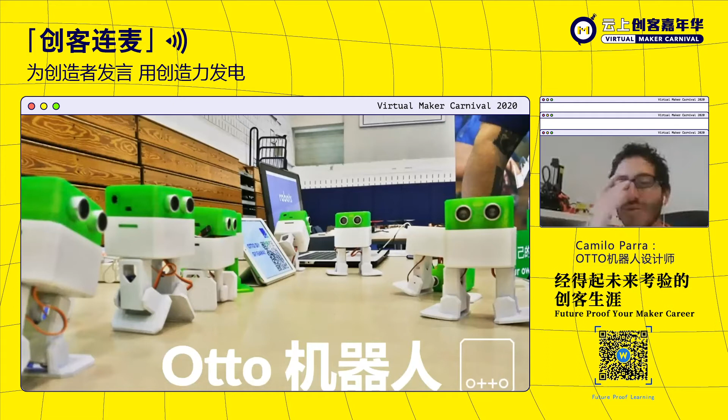I'm going to share my screen so we have more visual support here. This is Otto Robot. Many know me just for Otto Robot, but before getting there, like many makers, you get to make a lot of projects first. I actually started Otto in 2016, but back in 2014 when I moved to Shanghai, I was working full-time as an industrial designer for a company doing inflatable products. But they didn't have 3D printers—it was not such a fun thing. They always outsourced the fabrication of the prototypes, and I really didn't like that.

So in my spare time, I was spending time in the hackerspace XinCheJian, or the Mushroom Cloud in DFRobot, even in the Fablab of Tongji Daxue. I met great people, and that's where I started to learn robotics, because I'm not a roboticist myself. I learned Arduino, I learned 3D printing, and you get involved in that world—you start to buy a machine, buy parts on Taobao for your prototypes. Sooner or later, about two years after, I finally launched my own thing.

But before that, I did a lot of designs. One thing I want to show here is that the robots on top were designs I thought, as an industrial designer, I could make. They look nice, but in the real world they didn't work, because once I started to make them, I started to learn a lot of things by making.

Only until the latest one did I really start to make sense of the logic of building a robot, the mechanics involved, and the process to make prototypes work—the coding, the mechanics, the electronics. Only when you combine all these skills can you really start to make things reality.

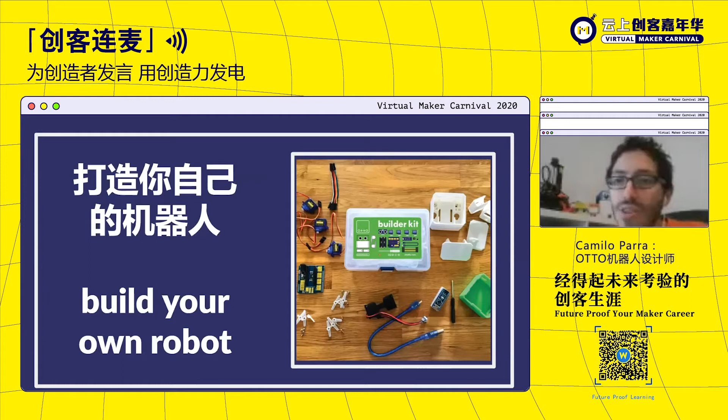The idea is that anybody can make their own robot and learn about technology in a fun way. It doesn't have to be boring theory like you learn even in university—building a robot teaches you a lot, not only robotics, but also technology, design, coding, and more.

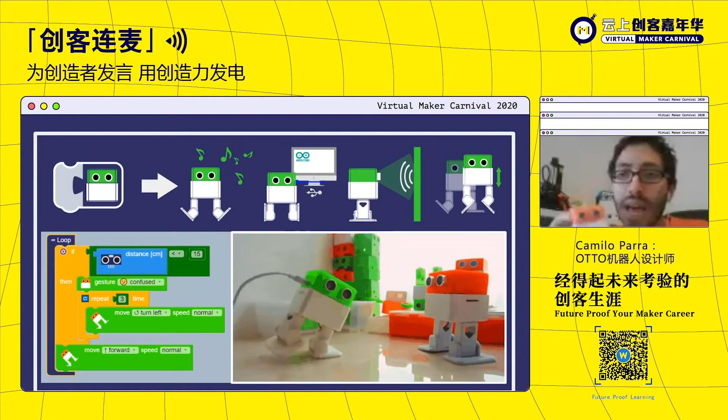Many people who don't know Otto maybe don't know what it does. In its basic form, it's this robot I have here, and it can walk and dance. You can program it, and it can avoid obstacles using ultrasound. It's 3D printable, open source in both software and hardware, and now we have block graphical programming, so even the programming is very easy for beginners.

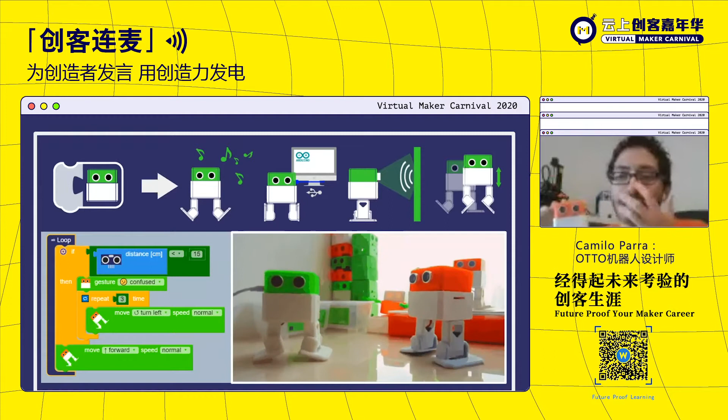But of course we didn't stop there. One thing we saw once we launched it is that many people started creating their own variations, myself included. We started from the bottom, but now the one I have in my hands has Bluetooth and you can control it with an app. We have others with LED eyes made with laser cutting—so we didn't limit ourselves to just 3D printing. Then we added arms, LED mouths, and other features.

We see it as a progression. Some people like to jump right into complicated humanoids, but we see it as a learning curve for people to progress into more advanced robotics. The starting point is still the small robot, Otto. Right now we have a community of more than 4,000 members across around 70 countries, thanks to the open source nature of the project.

One of the challenges we had was documentation. In Shanghai, I met the team of Wikifactory when we had all our documentation scattered across GitHub and Thingiverse—it was a mess. Then we really met the Wikifactory team, and since then we've been attached to them all the time for documentation and additional events and challenges, which I'll show you soon.

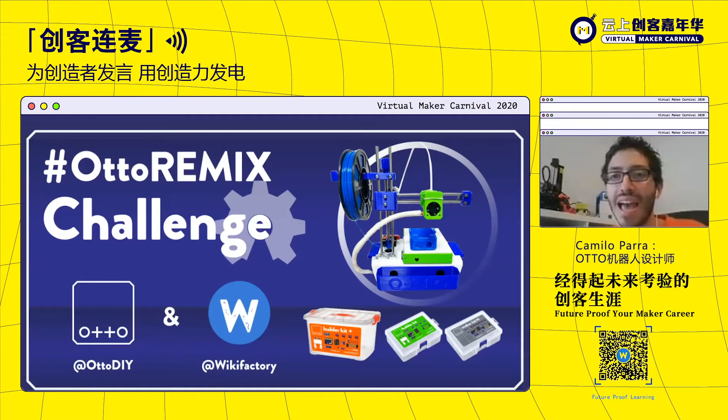With Wikifactory, we created a great challenge last year that inspired a lot of people to create their own remixes, as we call them. Right now there are more than 100 remixes, maybe 200, counting the ones connected on the platform through Thingiverse or elsewhere we still need to bring in, since people are always creating new stuff. More than 25,000 people have replicated the robot, based on download statistics and social media posts showing people who made the robot.

This is a short video that presents a little bit of the process of how the robot is made.

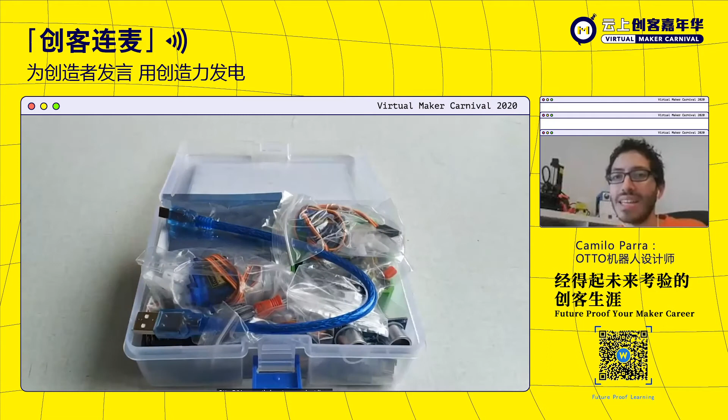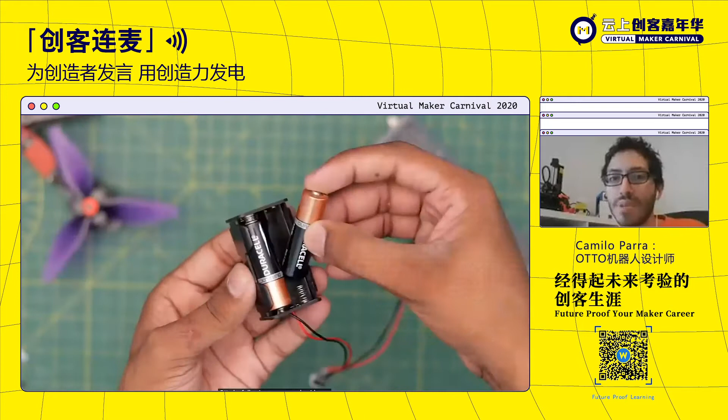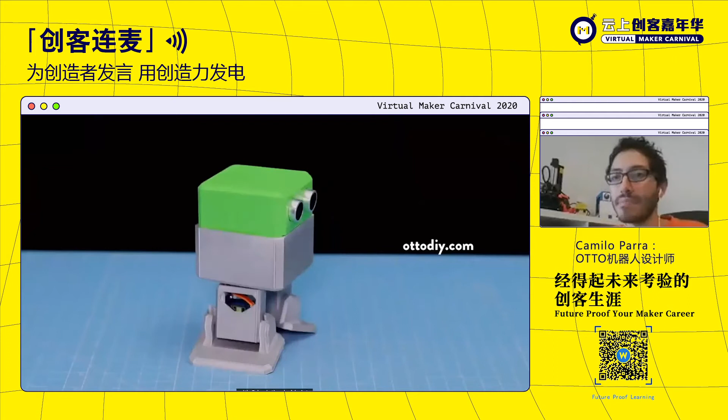It comes in a kit, and you build it from all the parts you have. You have everything, even the screwdriver you need to build it, all the plastic parts made on the 3D printer, and even the battery holder. It's an Arduino compatible kit, so it can be programmed with Arduino. The good thing is you can 3D print so you can decide what color you want.

The first kit we showed was a builder kit that already comes with the 3D print parts, but people can decide not to and just get the electronic parts.

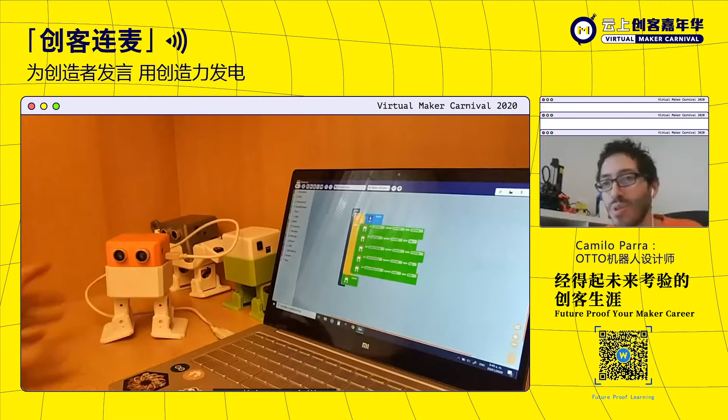Here is how you program it with the Blockly that we also created, and it's open source based on OttoBlockly, which is based on the Blockly graphical programming language of Google. We made a remix of the software so it can be dedicated to Otto.

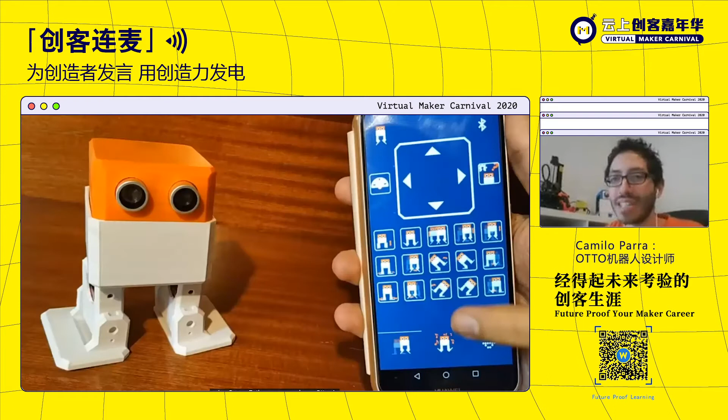Right now, here, this is the app. We also developed an app that is open source and allows you to make the basic movements of the robot, and you can even have some little sequences.

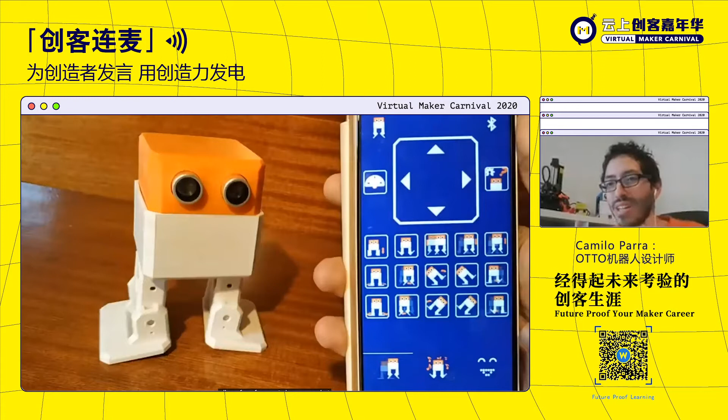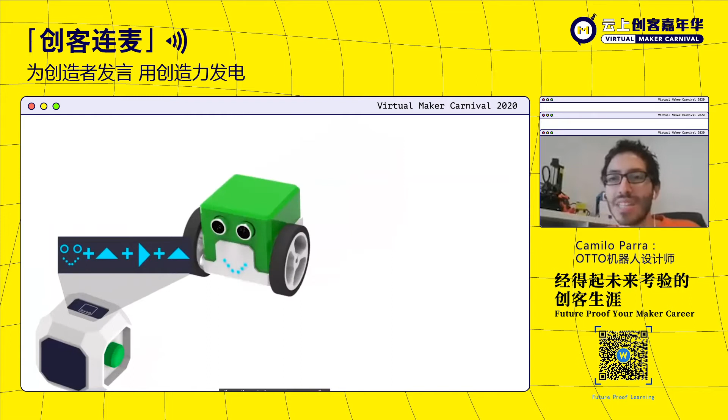This is something we are working on, so I'm revealing some hidden things, and it's more into tangible programming. We are moving towards a new era where even a 4-year-old kid can learn how to program.

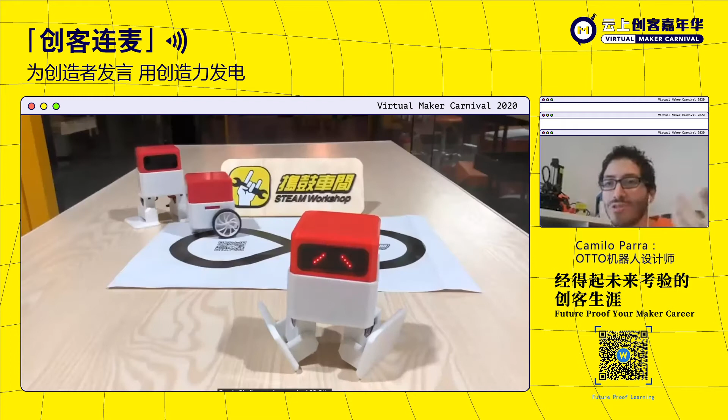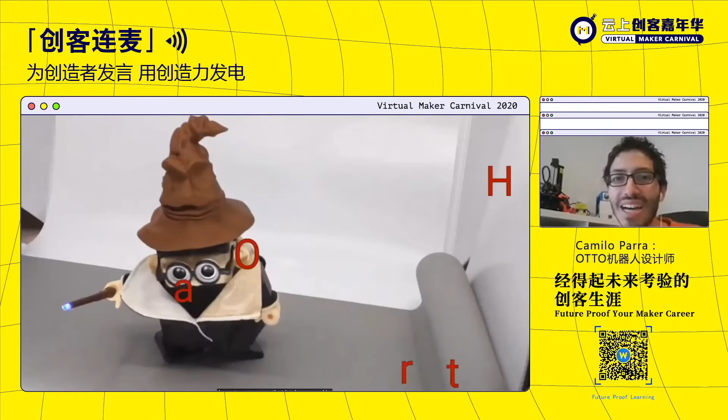Also in China, we saw many people creating remixes when I was living there. This was Pando by one of my friends in Hangzhou. You see all kinds of creations, here Harry Otto, the spider one. It really depends on what people want to do.

We are also working on a new version that we may want to mass produce.

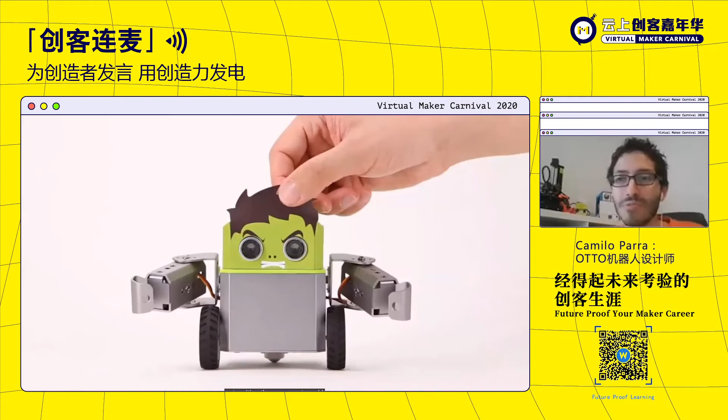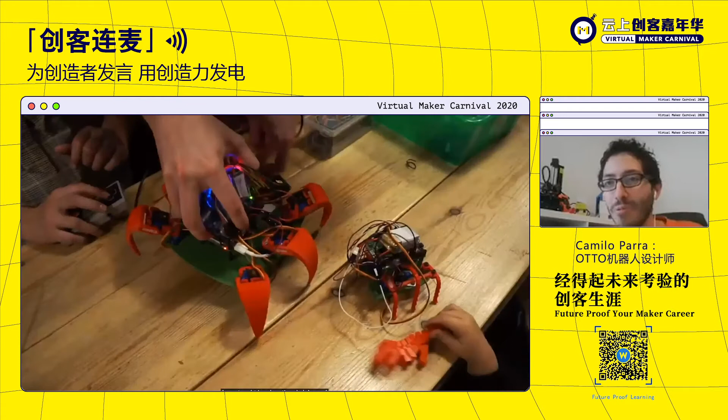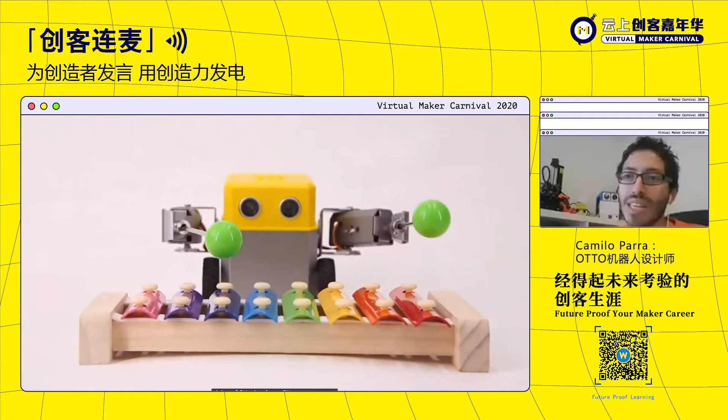Here you will see some pictures of the event we made with Wikifactory in Spain this year. We made a workshop. Unfortunately, now because of the situation, we don't do more workshops, but this is something we were also doing a lot in Shanghai. That's how I started doing workshops, to include people into the making.

Now we are even thinking about having a more modular robot that can be assembled in different ways with the same parts, and that's kind of the next step of the project.

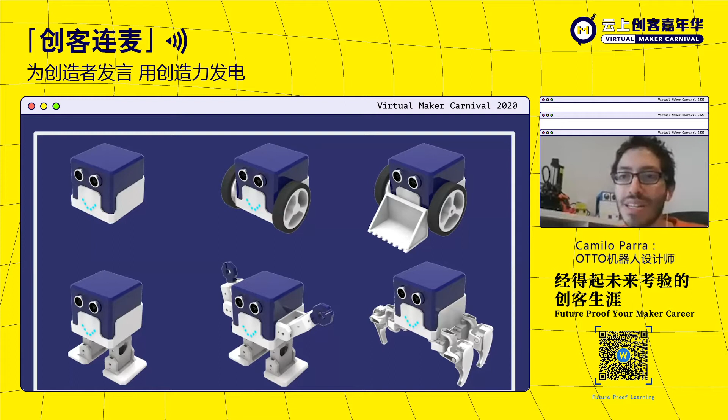Another new thing I wanted to share today is we are having our own educational platform that we call Otto Academy. Basically it's to gather all this knowledge we have been putting out there, but not really in a format for schools.

Now we are organizing it into courses and different learning experiences with our new Otto Scratch AI. You saw Blockly before - Blockly's interface is more like the old one, let's say, and Scratch is very popular in schools. So now we are working on the Scratch one, and we added AI into it.

The way we are adding AI into it is that you can have, for example, face recognition, voice recognition as well, and even pose detection with the robot. Somehow what we do is connect it to Watson.

Assistant that is by IBM. You interact with the cloud that has all the AI, and the AI sends the interactions to the robot. This is something very cool that we are already demoing in the last month.

We hope we can create a learning experience with this in our new platform to learn about artificial intelligence, design, and engineering coding. Those are the three areas we want to educate people with our kids, with the robot, so they can not just limit it to the building part, but also to all the learning behind that - which I somehow had to learn through the development of the robot, but now in a conscious learning system. Thanks for your time.

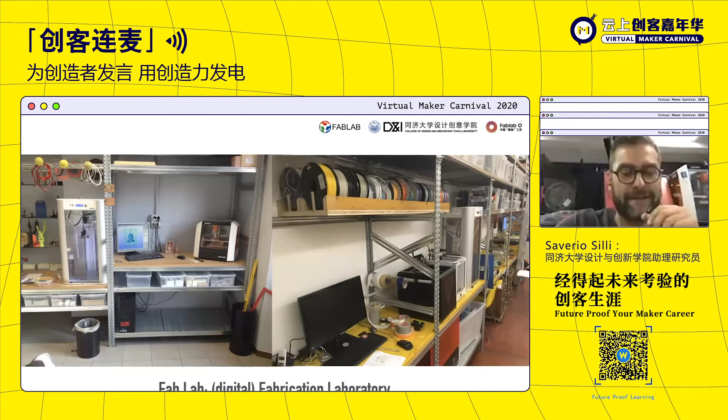So this story is a story about bits and atoms. You start from the computer world, the information world, and through digital fabrication, you can make real things in the real physical world. You do it in a Fab Lab, at least that's where I do it. Fab Lab means fabrication laboratory. It was started by Professor Gershenfeld at the Center for Bits and Atoms at MIT in Boston. So again, bits and atoms put together, digital fabrication.

These Fab Labs are a place where you can find all digital fabrication machines, and they are so successful that there are more than 2,000 Fab Labs all around the world now.

At MIT, Professor Gershenfeld teaches a class called How to Make Anything. This class is open every year to 15 students enrolled at MIT. But Professor Gershenfeld thought, what about opening this class to everyone who wants to join through online teaching and offline inside each Fab Lab around the world?

There are so many Fab Labs that are all connected in a network, and so the same class that Professor Gershenfeld teaches at MIT is also taught in Fab Labs, and it's called Fab Academy. This is the class that I took as a student, and that basically changed my career and changed my life.

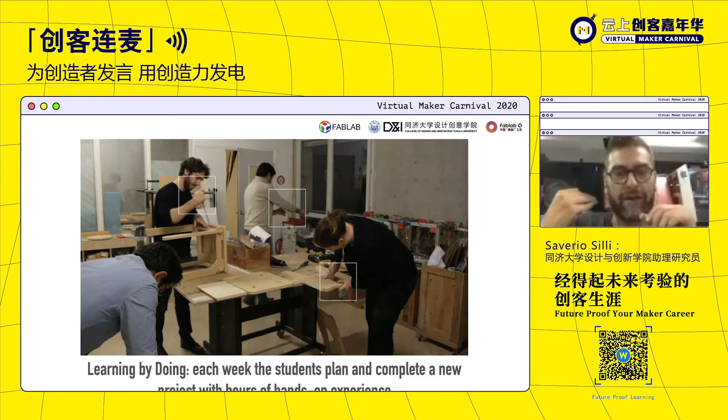This is the way it looks when we are all connected in this virtual classroom. Every Fab Lab is a local classroom of this network. Inside the Fab Lab, you learn by doing. This is really the basic of STEAM and STEM education and project-based learning that is now so popular. It's hands-on experience. You have all these tools and machines, and you have a project every week in which you have to make something.

So you learn how to use all the machines, the laser cutter, you learn techniques like molding and casting, you learn how to 3D scan and 3D print, you learn large format machines like a CNC router that you can use to make things - actually the table I am sitting at now is made with one of these machines.

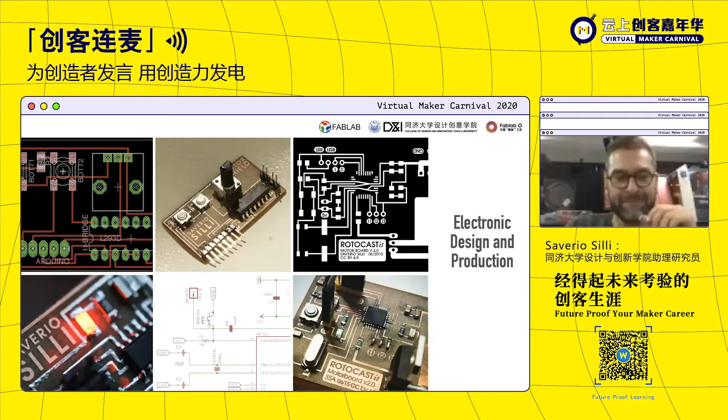You also learn, of course, that a digital fabrication machine is nothing without knowing how to design and make the file that you're going to send to the machine, and programming as well.

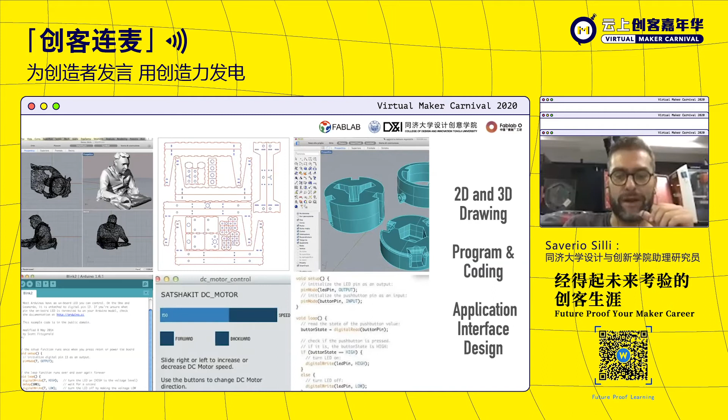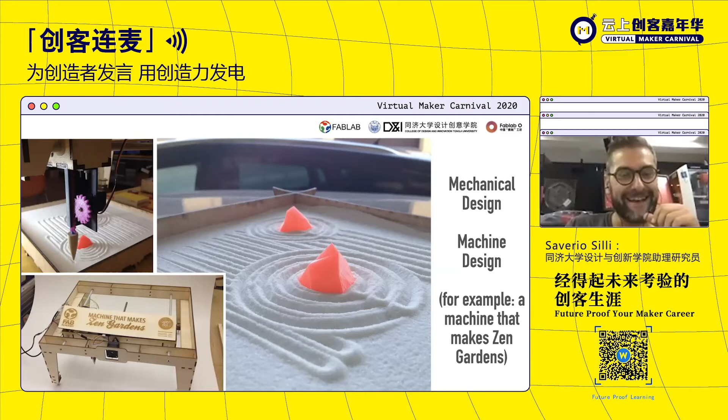Fab Academy is a class taught in Fab Labs around the world. I am the local instructor here in Shanghai. We've been doing it for almost 4 years now, and we're going to start a 5th year next semester. It's a digital fabrication course delivered through the global Fab Lab network, in which students make 18 weekly projects and one final personal project.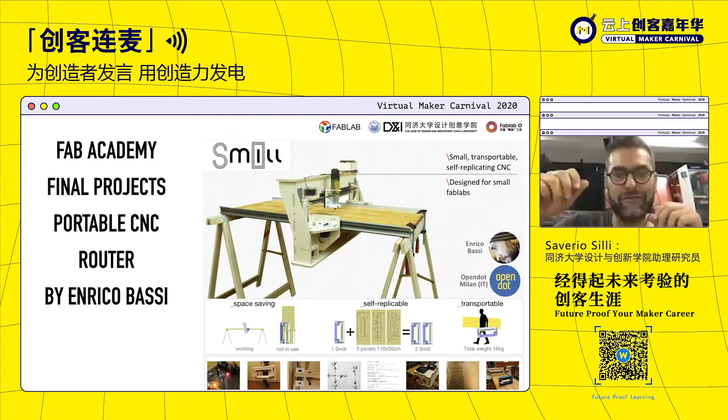You actually don't need a big machine that sits on the floor; instead you attach the machine to the wooden board you are going to cut. Another multi-tool machine by Gianluca Pugliese lets you change the actuator. It can be a pen, a marker, a little router, and you can put it anywhere you want, on the floor, on the wall, and so on.

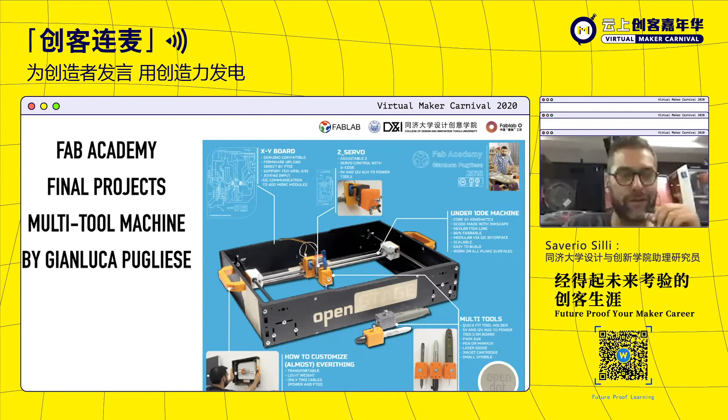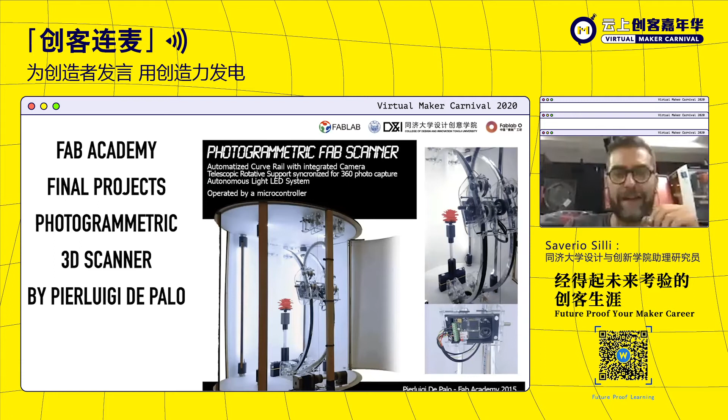A photogrammetric scanner is a machine used to take a precise 3D scan of an object while it rotates, by Pierluigi De Palo. And then finally, the machine that I made as a student in Fab Academy, a rotational casting machine.

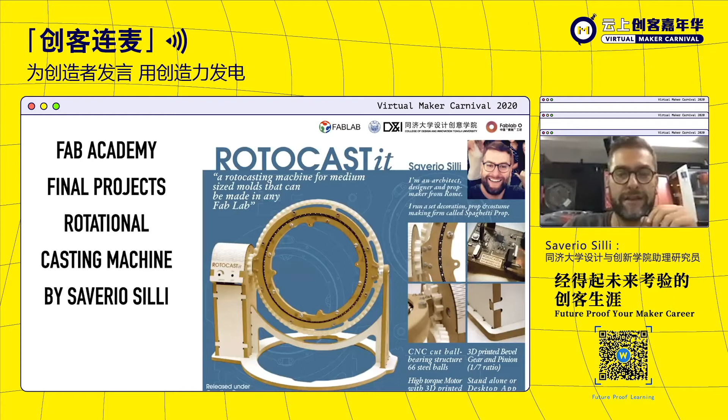I have always been in love with molding and casting, so I created a machine to help me make better castings. My aim in designing this machine was to make something that could be designed, created, and fabricated in a Fab Lab with the machines you have there. It's not a new invention, but it features a different way of working, like a very big ball bearing.

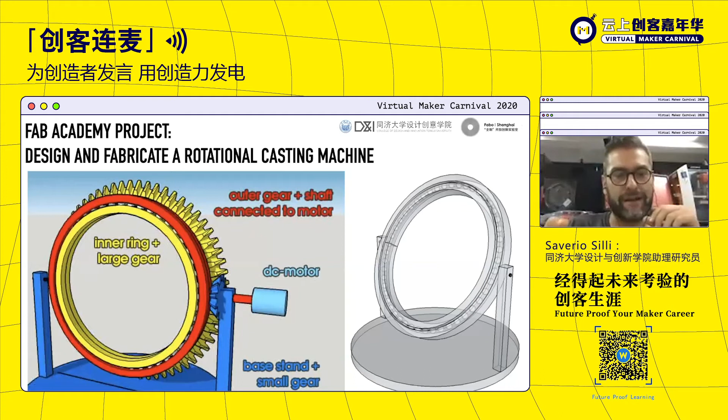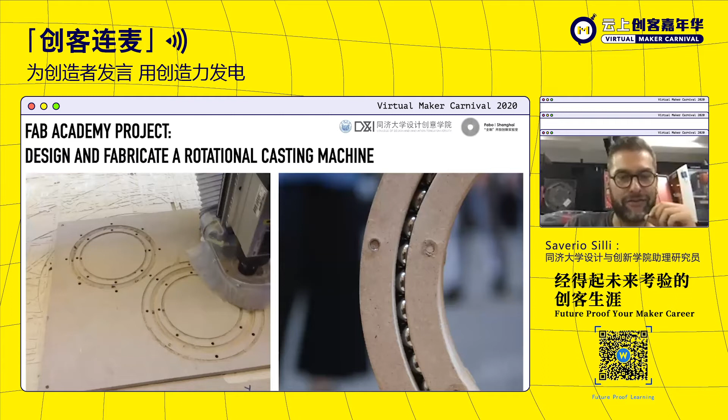I made all the design of this machine and found a way to fabricate it with the machines I had in the Fab Lab. This was the first attempt at cutting a piece of MDF. In this little video you can see there is a mix of techniques: 3D printed gears, CNC machined wood, and wood that I just cut with a handsaw.

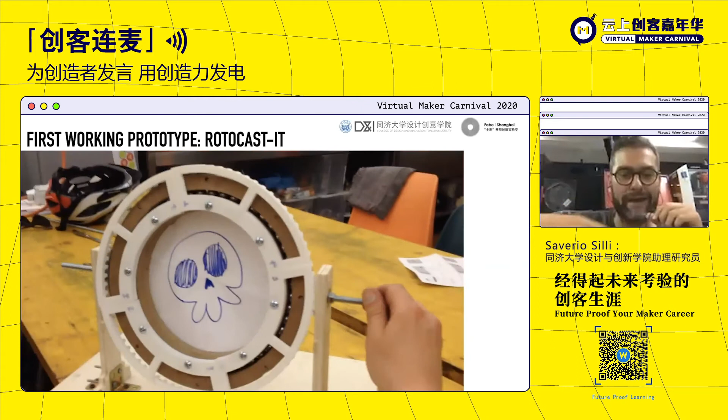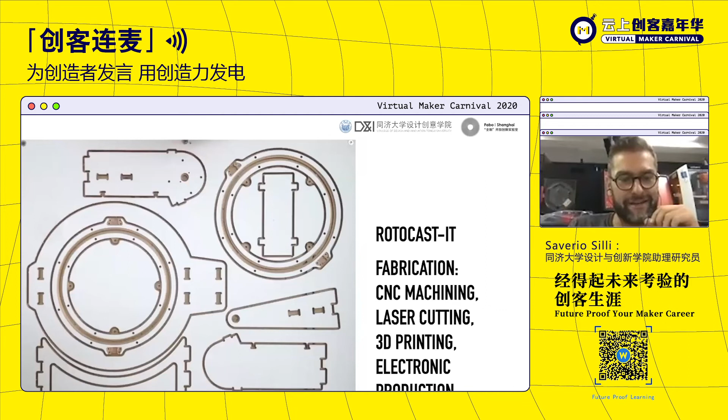The idea of this machine is that while it rotates on one axis, it also has an additional rotation inside. This is the design I made for cutting the machine parts on a CNC router - as you can see it gets a little more detailed here. And this is the image of the wooden panel after cutting.

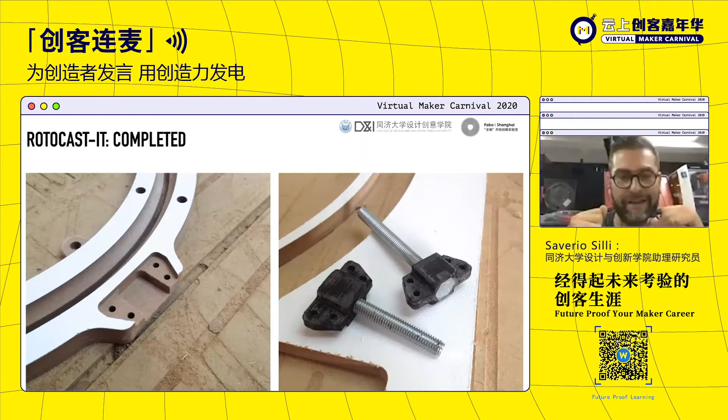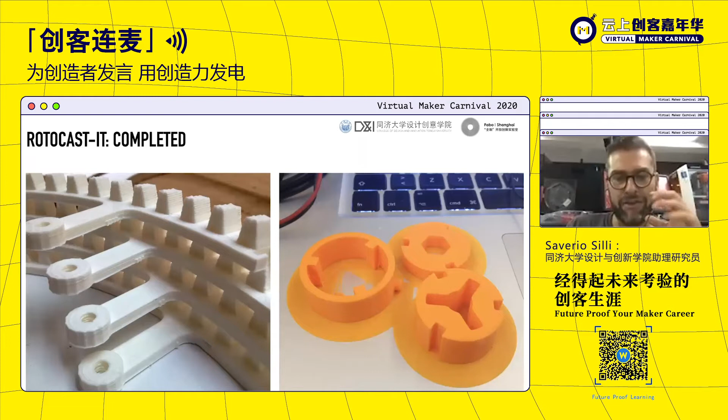I really limited, to the least possible, the things you have to buy - only bolts and a steel ball, and most of it is 3D printed. To make this machine I used the laser cutter, the CNC machine, and the 3D printer, and I also designed my own electronics. It's like an Arduino, but made by myself, with only the functions I need - not all the pins are available, only the ones I really need for this machine to work.

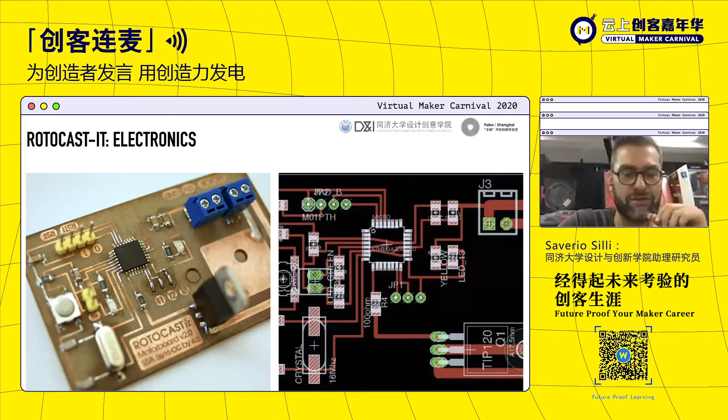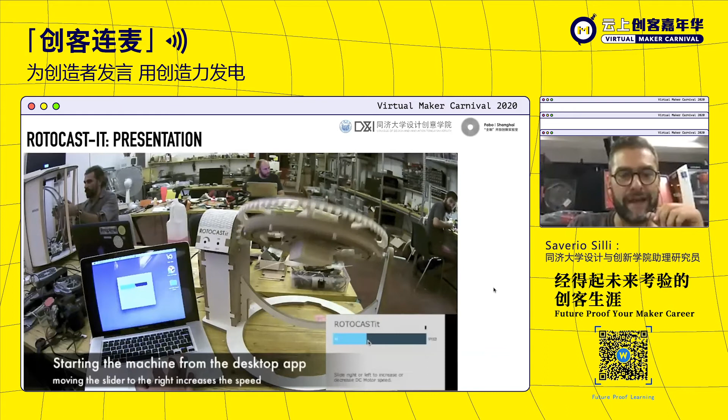This is a little video of the machine working. You insert a mold inside the machine, then there is an application you can use to control the movement, and the machine rotates. After a little while - like an hour or less depending on what material you're using to make the mold - you can stop the machine, open it, and remove the mold.

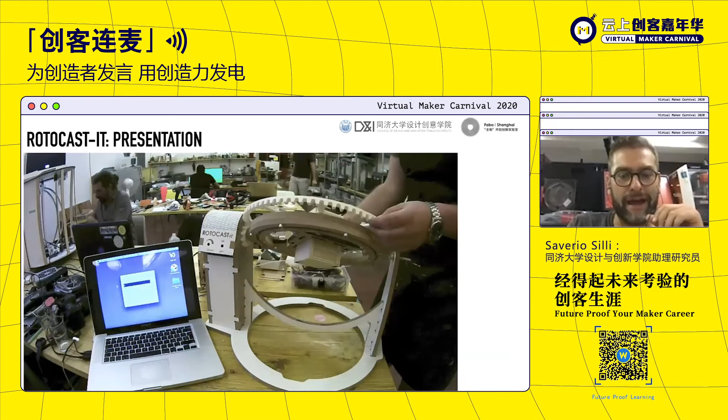Inside of this mold, here I am opening it, and this object that you see inside is hollow. So the idea of this machine is to make hollow objects.

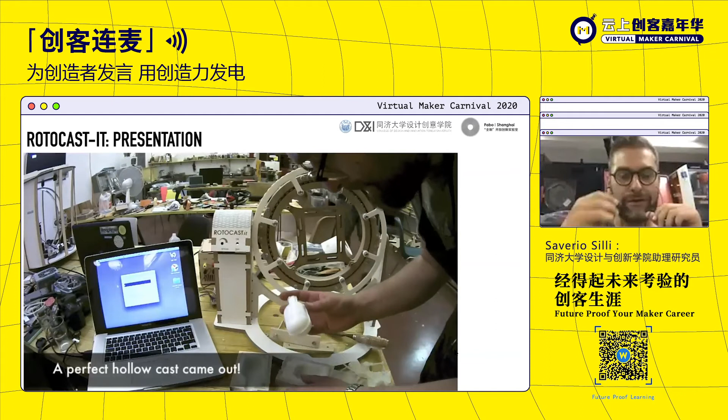So my story ends this way. In my opinion, documentation is the foundation of open source. I decided to release this project under an open source license. I wrote a long documentation on a website, took screenshots of all the settings of the machine I was using, what tool I was using, made a bill of materials and everything, and released this project as open source. I even uploaded it on Wikifactory.

And it is open source, ready for everyone to download and use.

And I also had some problems. This machine was just the first prototype, and it had a problem that the rotation was not so smooth. So I said, okay, I have this problem, I will come back and fix it. And then something happened and life goes on, and I moved to another project, and I never went back to fix that problem.

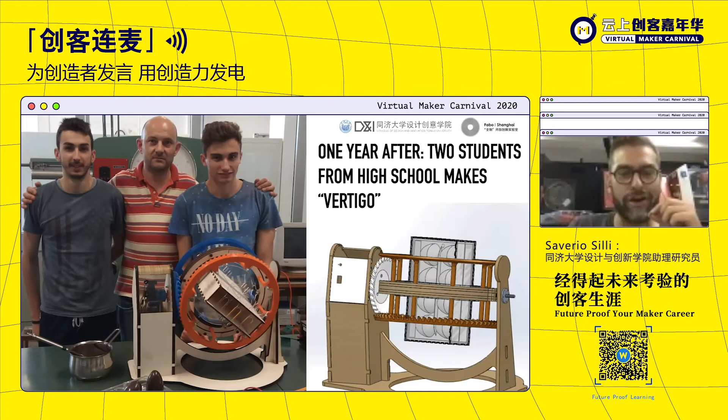Until I received an email and a picture from these three guys. This is one teacher in a high school and two high school students. They found my project online, they read my documentation, they liked my machine, they made their own version, and they even fixed the problem that I discovered, and they used their machine to make chocolate eggs. So chocolate eggs that are hollow inside. This is a very famous dessert-like thing in Italy for a holiday.

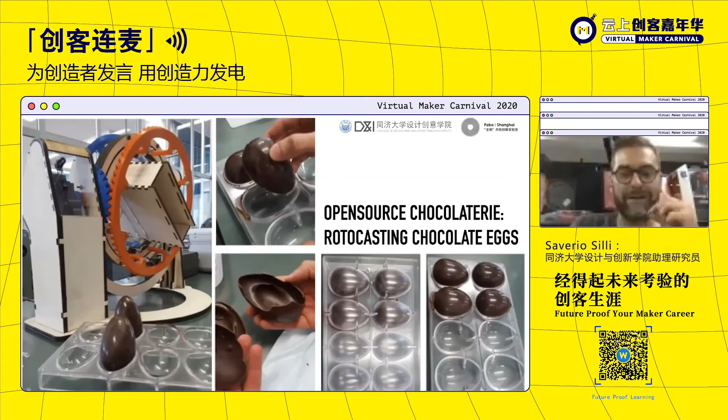And when I received this email from them, I was so happy. We even met at a Maker Faire in Rome, and we put these two machines together. And then I downloaded and printed the part that they fixed, and I updated my machine. So because of an open source license, I was able to have basically research and development and fixing problems, debugging made by someone else for free.

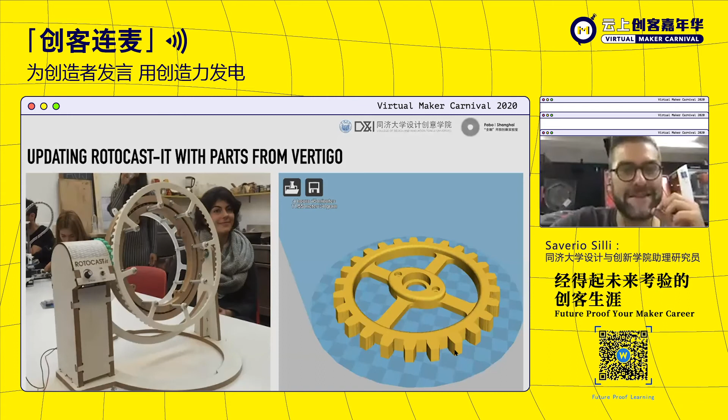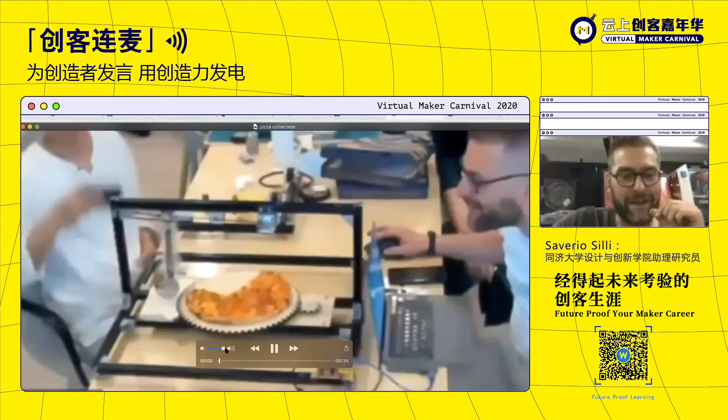My story ends here, but I want to show you my page on this project on Wikifactory. And one last thing, I don't know if the video maybe is not so detailed, but this is the last project that I've been working on with my students. It is a machine, but this is a pizza cutter. So you can make a machine that does not make much, does not change the world. This machine cuts pizza. It was maybe for fun, but this is the kind of project that we like to work on. So once you learn how to make a machine, you can learn many of them.

This was during the Fab Academy presentation in the last semester. This is it. I can stop sharing. I hope you enjoyed my little story. And if you happen to be in Shanghai and you want to come take a look at Fablab O, we are always open.

What a great story, Saverio. I loved it. So true. So clearly, thanks to good documentation, not only can others like yourself learn the projects, but you can also begin to contribute and remix on the projects, whether it's OttoDIY, whether it's on the Rotocast-it. This is what it's about. You can take reins of your learning and contribute to these incredible innovation areas. I'm going to take one quick moment because this is the cue.

You mentioned OpenStage, you mentioned the S-Mill. They're also part of this collection of future-proof learning projects that we'll be sharing through our QR code and through the link provided. And if you click through, it will take you to this great page that has all of these projects. It includes OttoDIY, of course, and the Rotocast-it. There's a whole ton of projects. They're all very well documented.

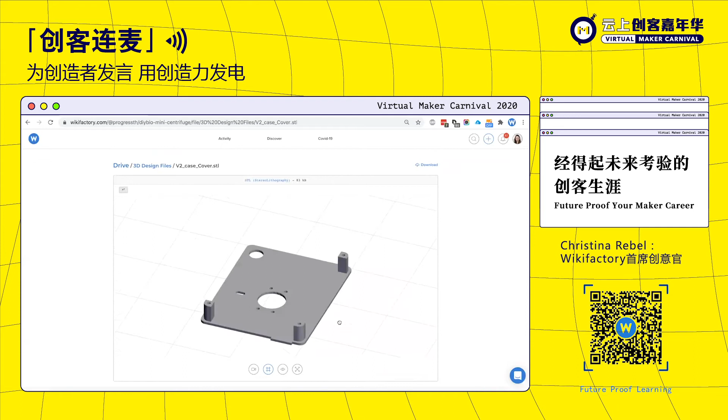So all the documentation here, this is a centrifuge developed by a team over in Thailand with all the files. You can click through the files. What's neat is that you don't have to, well, here in this case, they've shared in STL. It could be that they shared in SolidWorks. It doesn't matter because on Wikifactory, you can open it up and view the files directly. It's taking a moment to load. And you can even actually comment, ask any questions away to the project. If you have ideas on how to improve it or have a problem in any step of the way, you can open an issue and ask the project creator directly.

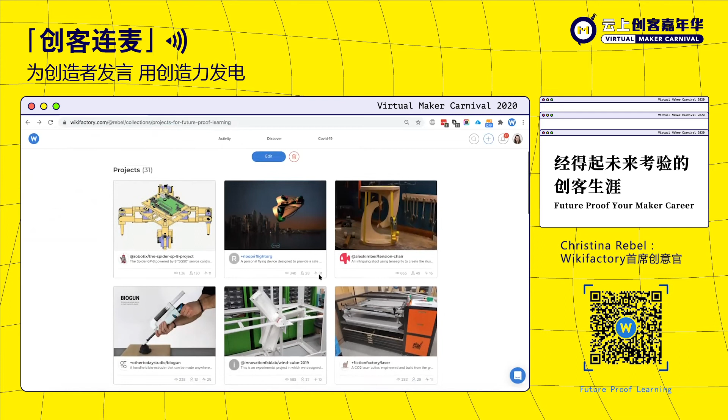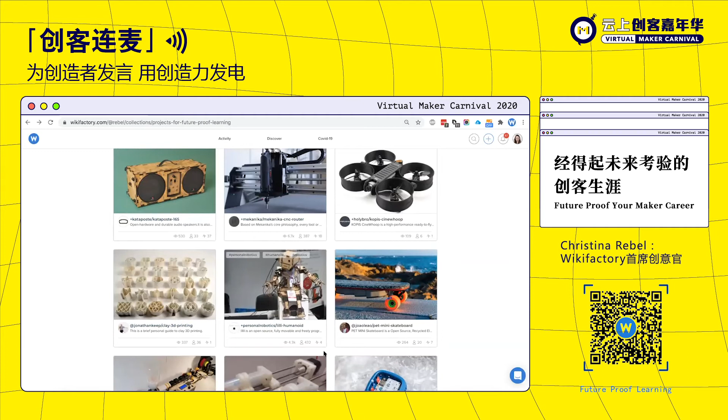This is what becomes possible thanks to the contributions of OttoDIY, of Rotocast-it. And this is the future of learning, and this kind of cues in just right to our next speaker, because all of these projects highlight that there's an opportunity, whether in learning in robotics. Let me show you, we've got projects in robotics, so a spider project. You know, there's project around mobility, furniture design, biomaterials, sustainable tech in building your own turbine, your own. It can even be consumer products like making your own speaker, because there's quite exciting developments around music in itself. You can learn how to recycle material to make your own electric skateboard. There are so many projects that you yourself can learn from right now and future-proof your career.

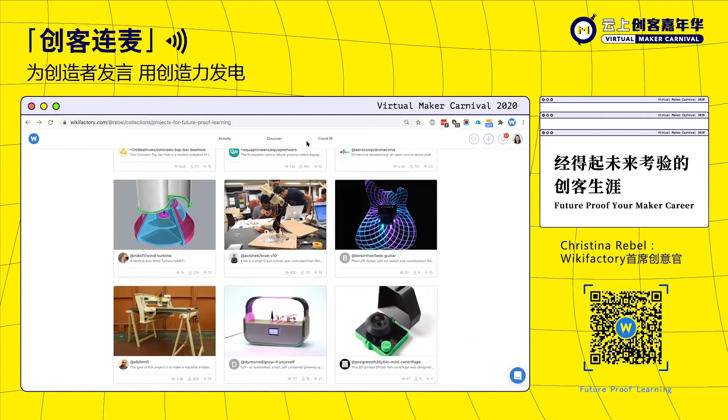But beyond all these product innovation areas, to loop in our last speaker, Agustin, it's not just about potentially sustainable tech or biomaterials. There's a future in education.

Education will always play a role in our society. And I love Agustin's story because whilst he's an incredible product designer, he's actually carved his path in the education market so that others like you can really go deeper into that career path and start shaping it. So over to you, Agustin. I would love to hear your story.

Well, thank you very much to Saverio and Camilo for sharing your stories. They are certainly inspirational, and in the end, I believe we all share a common story fueled by creativity and curiosity. So I will share my screen. I prepared a very simple presentation focused mostly on what I've done during the 27 years I've been living on this planet so far.

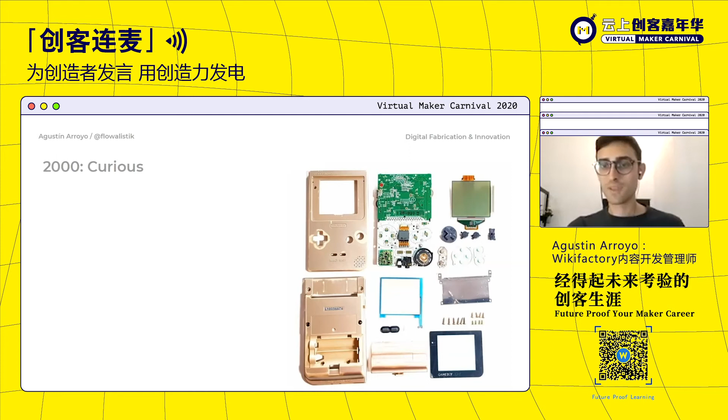Basically, I was born a maker. That's one of the main things I need to address. However, I didn't realize I was a maker until I was, I would say, 20, 23 years old. It was 1993, I was born in Argentina. But I started cultivating that curiosity towards product design since I was a kid, disassembling all the electronic devices I could find. That's something maybe Camilo and Saverio can relate to - like, how does that work? You learn, what if I change that component?

In 2010, I decided I wanted to study design. I didn't choose architecture or engineering, I decided I wanted to focus more on visual effects and graphic design. But in 2013, as it happened to thousands of makers out there, I discovered 3D printing, I discovered laser cutting, and I discovered a massive community. I got my first 3D printer, I started making on my own and learning on forums, on social media, from individual makers that simply wanted to share their projects.

Thankfully, I fell in love with the community, and after years of making and learning on my own, I had the chance to start sharing all that knowledge. I became an educator in a social Fab Lab in Spain, in Technolab, where young teenagers that didn't know about 3D printing could play with that technology, learn how to use it, and have access to it. Then in 2018, I had the biggest opportunity at the Universidad Francisco de Vitoria in Spain, and I became a university professor teaching 3D printing to architecture students.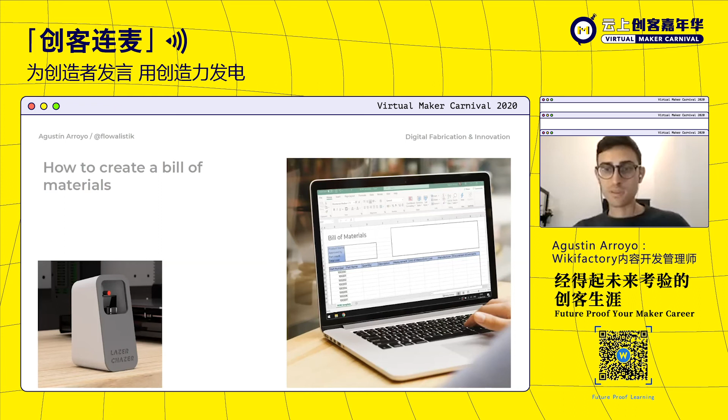The same goes for bill of materials - Camilo, for example, needs a very specific list of materials. When he created the Otto kit, he made a box with all the components because he understood that getting all the components from different suppliers would be a nightmare. So you can see with Camilo and Otto that having a bill of materials is one of the crucial aspects of product development. Then there's choosing the right materials, because Saverio will know in the Fab Lab that not all materials have the same properties - think about laser cutting, 3D printing, or CNC machining.

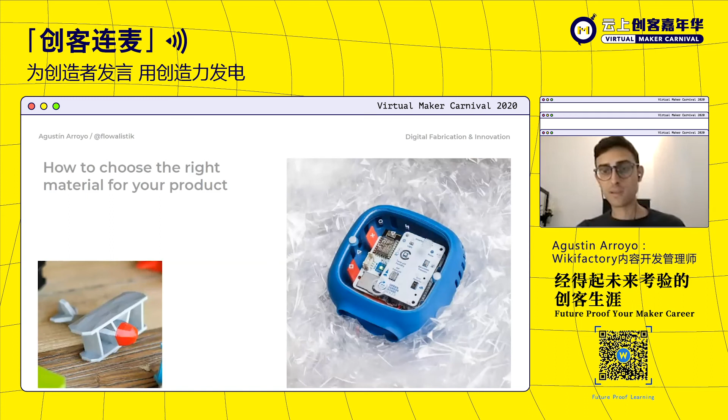In my case, I learned about it creating a social product, a small airplane that was the key element in a fundraising campaign. Then we have how to design for assembly, because I tried being a YouTuber and learned that designing something easy to assemble is critical when you're going to share it in an open source way. I wrote a guide on some basic tips on how bigger product design companies are implementing it during their product development process.

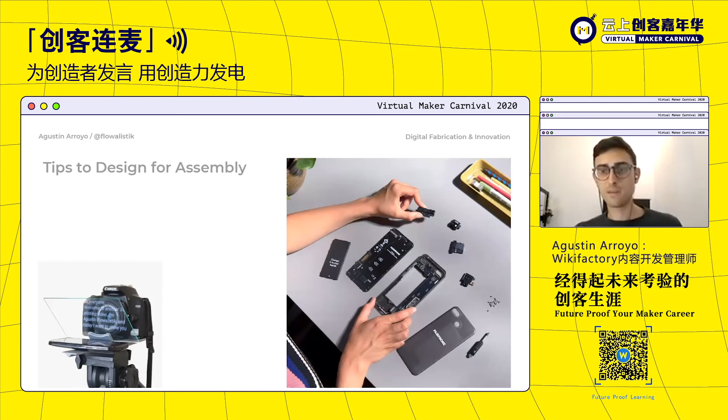Then we have efficiency when prototyping, because most makers do this on our own. We are hobbyists, and we need to learn how to make sure that when we move to the next step, all the previous concerns and risks have already been addressed.

So basically, to wrap up my presentation, I want to say that sharing your projects is as important as developing them. I think most experienced makers will agree on that. Documentation is a key aspect, collaborating with the community also. And now that we are talking about open innovation, I want to say that the more the product design and maker communities know, the better they are.

Keeping your ideas for yourself may be useful if you have a commercial approach, but even if that's the main reason why you're not sharing it, I think we can all agree that involving the community is a very important step when we are trying to create something meaningful.

And the last thing is that, as you've seen, hard skills like knowing how to use a machine, or how to document a project, or how to transform it into a commercial product is really, really important. But product designers need to understand that soft skills are what really make the difference.